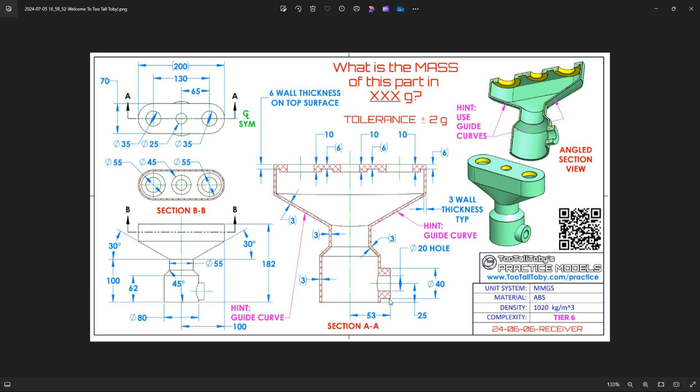So let's hop over to IronCAD and show you how to build this model. So we'll start with the cylinder and drag and drop it out. We'll start at the bottom of the shape, so we know it's got an 80 diameter and a 62 height for that shape. Next, we'll go ahead and add the next one on top of that as well.

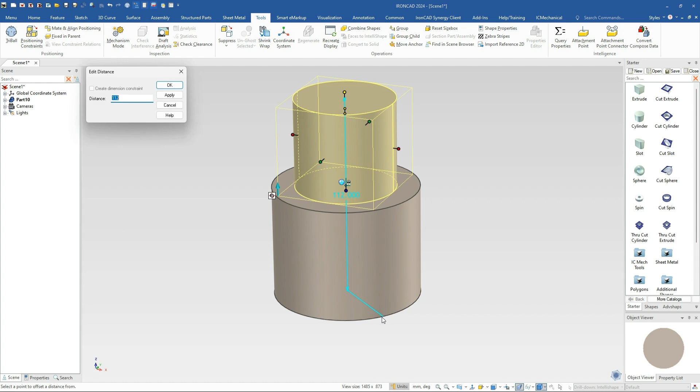So we'll go ahead and add that one, which we know has a diameter of 55 inside of there, and we know that the distance from the bottom point of this guy has actually got a total value of 100 inside of there. And as we mentioned, this is the distance of 25 divided by 2.

We're just going to do a chamfer on that, so we're just going to select that edge, right click and do chamfer edge at a 12.50 to give us that 45-degree angle there.

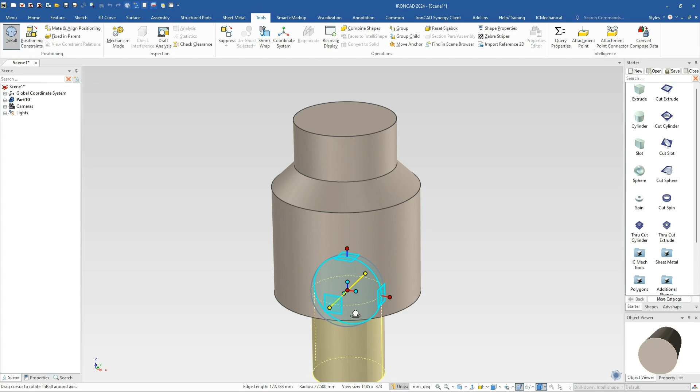Next, we'll go ahead and drop a cylinder right here on the bottom. I'm holding the shift key and hitting that edge. It's going to drop it on the bottom for me, because I can simply just rotate this around 90 degrees, and it's going to move it up, which we set has a value from the bottom is 25 on there.

And we know, since on the center of this guy, since I just rotated about the center and moved it up, I know the distance, the total distance of that is actually 53, so I can set that as well. So there we go. We can build that shape initially.

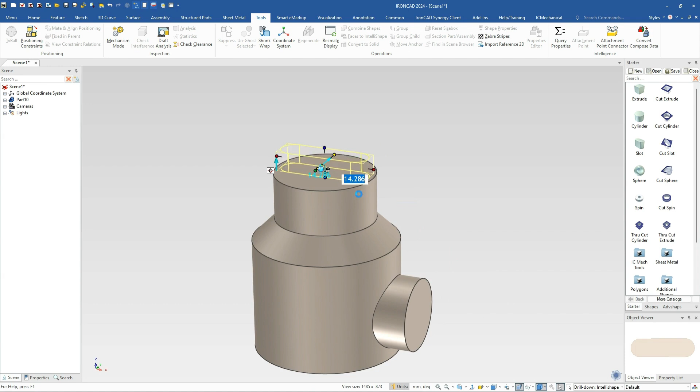And next, we're going to go ahead and drop our slot feature on here. And in this case, we know the overall length of this guy is 200, and the width of that is 70. And again, we don't know the height, but we do know that we know the top of this to the bottom here.

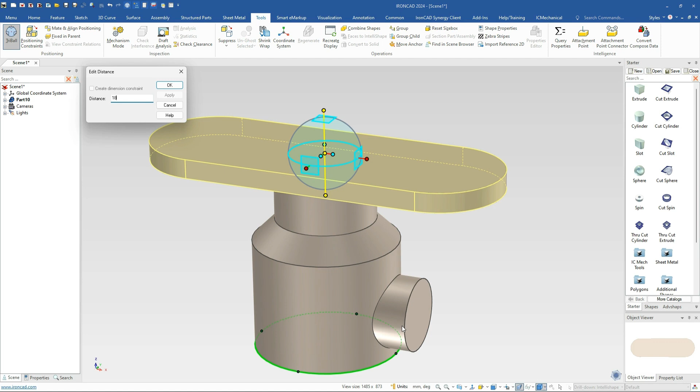So we'll just basically use our TriBall again, move it up to the top by hitting the space bar, move it up, and then we can do an edit distance from the bottom point here, and we know that distance is 182 to move that up to the top. So there we have our location.

So now we just need to find the depth, and to do that, we're just going to use a sketch here. So we'll just go into our home here. We'll draw a 2D profile. We'll place it right here. So pick normal to face.

We'll pick that point. We place it there. We have our X direction. If we want to be specific, we can say that you want the X direction along that edge there, and place that and hit OK to drive that.

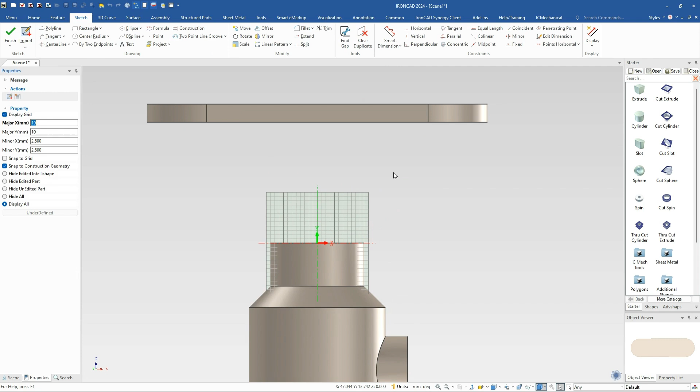Next, we're just going to draw a polyline from our outside point, and we're just going to drag it up to some distance here, and I'm going to right click, and we know the angle actually is 30 degrees on that, so we'll just drive that to 30 degrees.

And next we can actually just project this geometry up here, and we'll get rid of this curve we don't need, and we'll just extend this down to that point. So we're going to use this point as our height value.

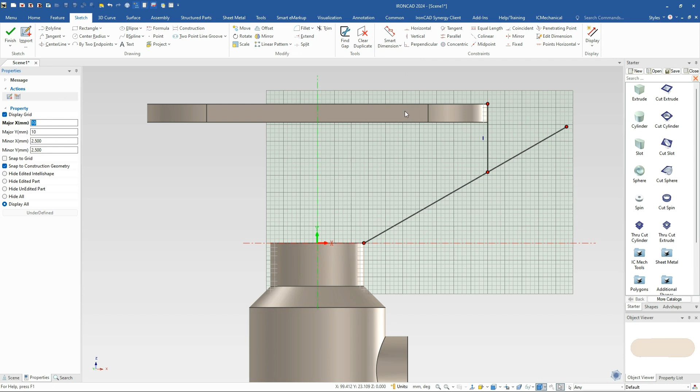That's the intersection essentially. So we'll just go ahead and select that as finished, and we'll just move this down to this point here and place that. So that gives us our exact height.

And now we can simply just do a loft, and our loft is going to be between these two features here. So we're going to pick that face there and our face there to loft that shape. That's a very easy way to do that, and it will give us our shape inside of there.

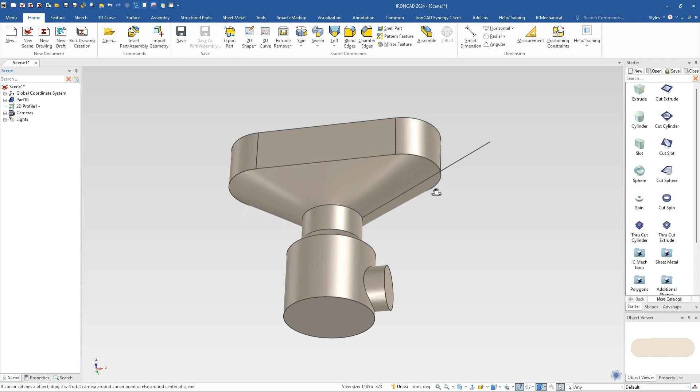So this is just reference geometry here. You can hide this if you like, so you can get to your real geometry.

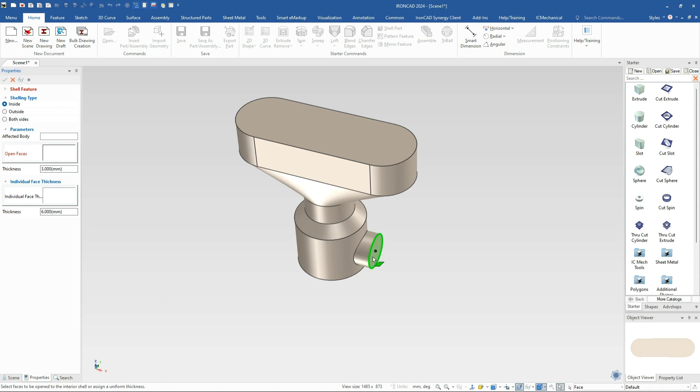Next, we need to do some other modifications, which is our shelling feature. So let's go ahead and shell this, and then we can add our cuts to this. We hit the shell part command, and we're going to select the open faces, which are going to be this face here and this face here.

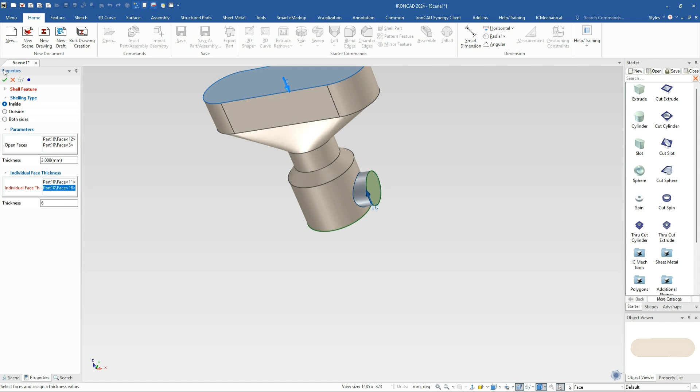Normally it's going to be 3 millimeter thickness. We want to change the outside thickness of this to be 10 millimeter, so we'll type 10 millimeter for that one, then pick this top one and make sure we get that highlighted. There we go, that's the 10 millimeter on the side. This one's on the top, we want 6 millimeters for that, and hit OK. That gives us our shell inside of there with our different thicknesses.

Next, we just need to put our holes on the top, and we're going to have to reorder these, so I'll show you how to do that as well.

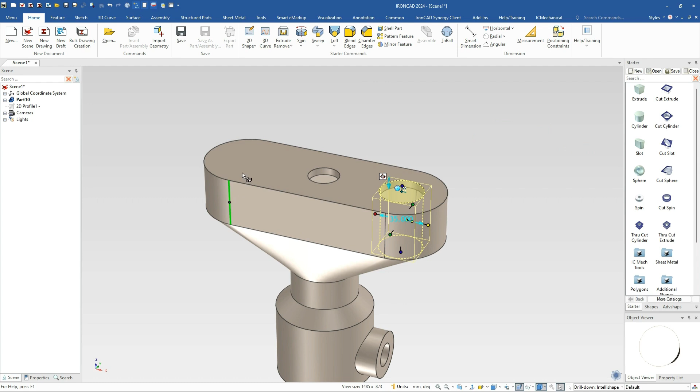We're going to put a cylinder here in the middle, that's got a diameter of 25. This one over here has got one of 35, so we'll type that as 35, and we can copy with a TriBall or just drag another one out, either way it would work. That was 35 as well.

Next, we need to add the other cylinders on the bottom. So we're going to hold our shift key down, drag and drop it onto this edge. That'll put us in the center inside of there, and the diameter of that one is 55, and it's got a depth of, we want to add 4 basically to that, because it's got 6 plus 4, giving us the 10 millimeter.

So we'll take that feature there and use the TriBall, and we're just going to make copies along the plane here. We'll right click to center point, and right click on this edge and make a link there, and we'll go do the same thing again to center point here, and right click and just make a copy because it's going to have a different size.

So these two are 55 on that. This one actually has a different value, which is 45 for that one.

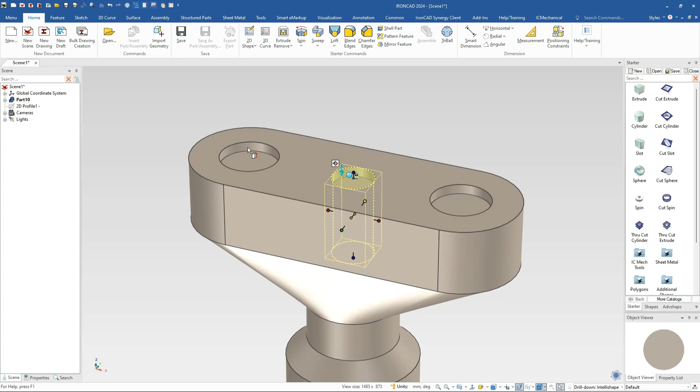And now we can come back to our shapes here. We want to make sure that these aren't cutting through, so we're going to pull these two up, make sure they're not cutting through into that bottom edge here. This one's cutting in the middle, that's fine, it ain't going to hit anything. But these two, since they're not cutting that geometry, you need to apply these last.

So we can just right click on these and say apply last, and that's just moving the feature in the tree to the last. So now we have our cuts there.

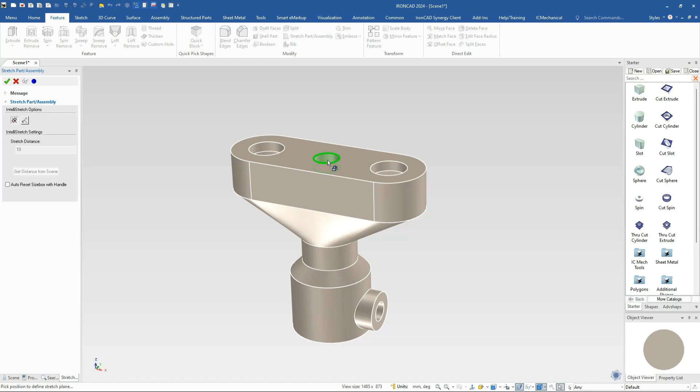So that's essentially all it takes to build this model, and if you want to, you can always use our feature command, our section part tool, and you can place that on our center point here, or on an edge. If you want to do another quick way to do it, select your part first, hit that, and then it should allow you to—oh sorry, this is stretch.

Let me go to our section tool, which is on our home, I think it's on our tools ribbon, there we go. I want to section the part, not stretch, sorry, picked that wrong, there we go. That's our section plane. Let's reverse it here and hit OK, and you can see that geometry there.

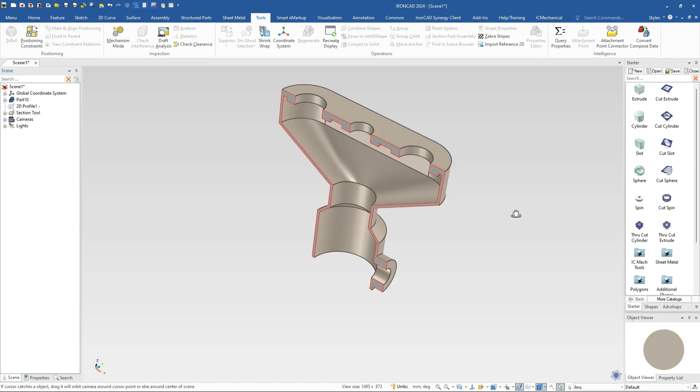So this has got our 10 millimeter, 6 millimeter with these extra geometries here, which gives a total length of 10, and there's our 30-degree angle on our model as well. So that's just a highlighted preview of that model.

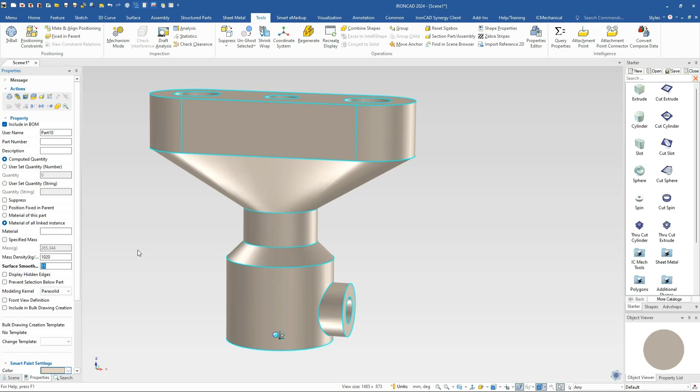Now we can go into our properties, give it a density of 1020, hit tab. That should give us a total value for our mass of 265 inside of there.

So that just gives you a quick way to build that model in IronCAD. Fairly easy to do inside of there, and nothing too tricky for IronCAD to do that, just some ways to position geometry and features to get you what you need to build your geometry. Hopefully you enjoyed it. Thank you.